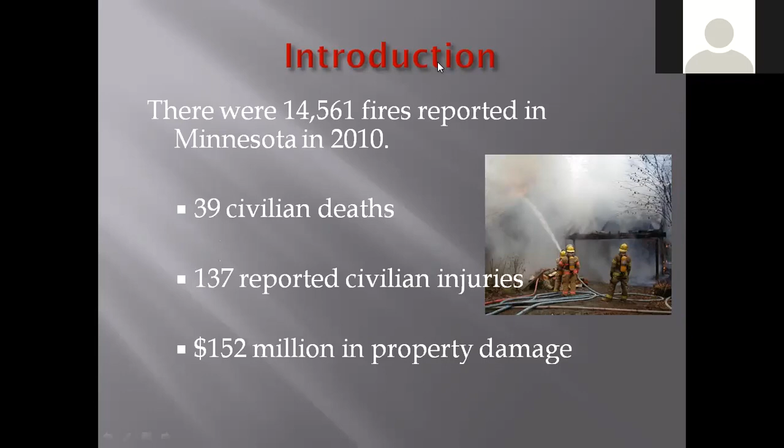Fire is responsible for a lot of things, and death is one of the things that fire results in. If you look at the example for Minnesota in 2010, there were 14,561 fires reported. Apart from the deaths, there were 137 reported civilian injuries, while there was 152 million dollars in property damage.

Most of us always feel our houses are the place that is safe for us. However, we can see that 76% of all structural fires occur in residential homes, while 97% of structural fire deaths occur also in residential property.

So what causes fire? Based on studies, the top 5 causes of fire include cooking, open flame, heating, incendiary or arson, and smoking. Those are the things that are responsible for fire.

So from there, we go to fire science. For fire to start, there are 3 things - there are things that will make fire start. Let's look at them one after the other.

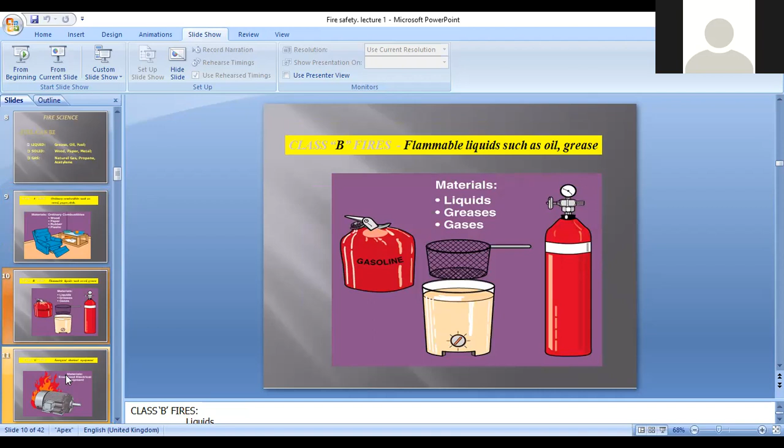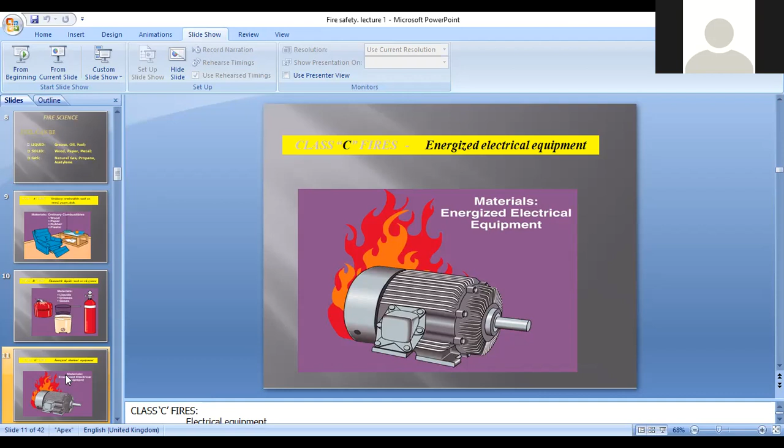Class B are flammable liquids, such as oil and grease. Those are class B fire. Class C are energized electrical equipment, while Class D are flammable metals.

We will add some more of the classes when we get to it, but these are just preliminary for us.

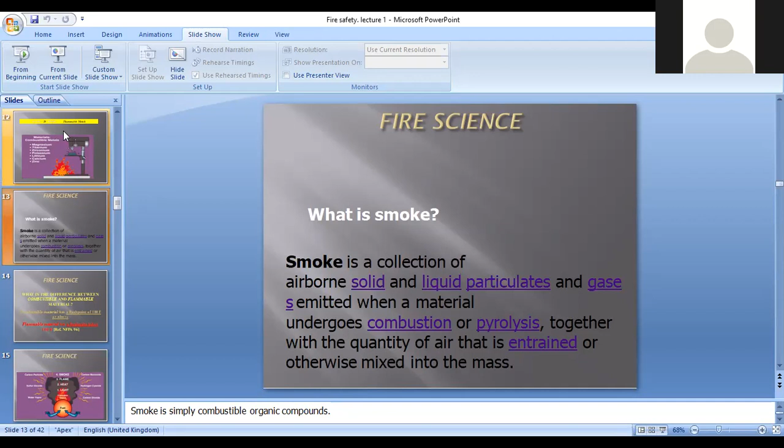So we said fire is always accompanied with many things. One of the things that accompanies fire is smoke. So what is smoke? Smoke is a collection of airborne solid or liquid particles and gases emitted when the material undergoes combustion or pyrolysis. That is what we call smoke.

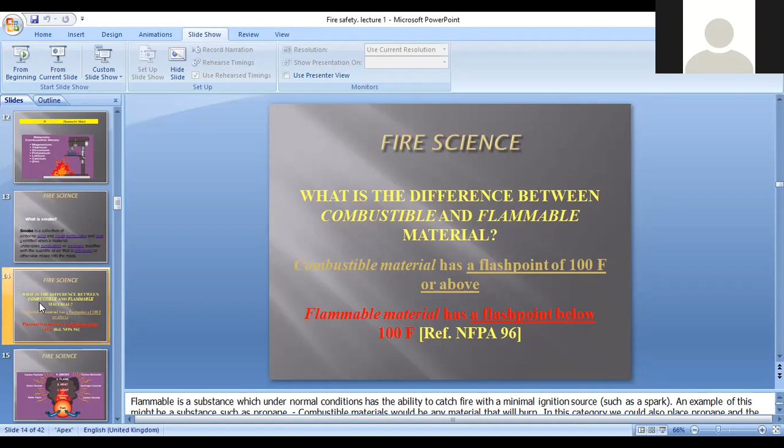So when fire burns, when things burn, it causes fire. But there are two different types of burning that occur - what we call combustible and what we call flammable. Combustible materials are materials that have a flash point of 100 degrees Fahrenheit or above, while flammable material has a flash point below 100 degrees Fahrenheit. That is the difference between a combustible and a flammable.

So when fire occurs, we always feel that the only thing that we see is the flame or the smoke. However, when fire occurs, there are other gases or other things that accompany fire - carbon particles, sulfur dioxide, water vapor, carbon monoxide, hydrogen cyanide, light, smoke, heat. Those are the things that always accompany fire.

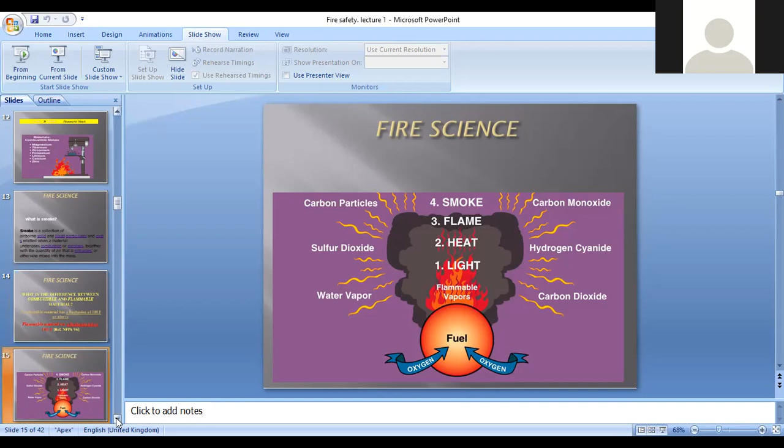So we know that for fire to occur, we need the tetrahedron of fire, which means the three elements of fire - fuel, heat, and oxygen - must combine together to form the fire tetrahedron through a chemical reaction. That is when the fire occurs.

But when that fire occurs, how does it burn? That takes us to the phases by which fire burns. The phases at which fire burns also depends on the time the fire is burning, the kind of air within that environment - meaning the ventilation characteristics of the confined structure - and the amount and type of combustible material present. What is burning also determines the phase at which the fire burns.

If you put a metal down and paper down and light the two, it will take a few minutes for the paper to ignite, but it will take a longer time for the metal to burn. If you take paper and wood, paper will burn quickly and get off easily, while wood will also burn but take a longer period.

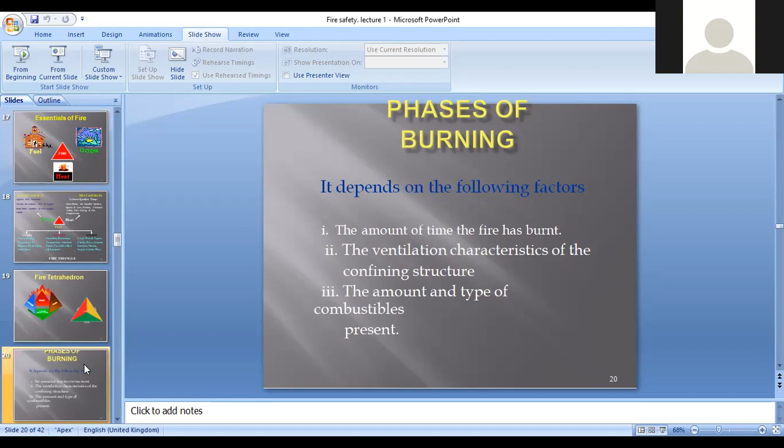That is why they say it depends on the amount and type of combustible materials burning. There are three basic stages of burning: the incipient or beginning phase, the free burning phase, and the smoldering phase.

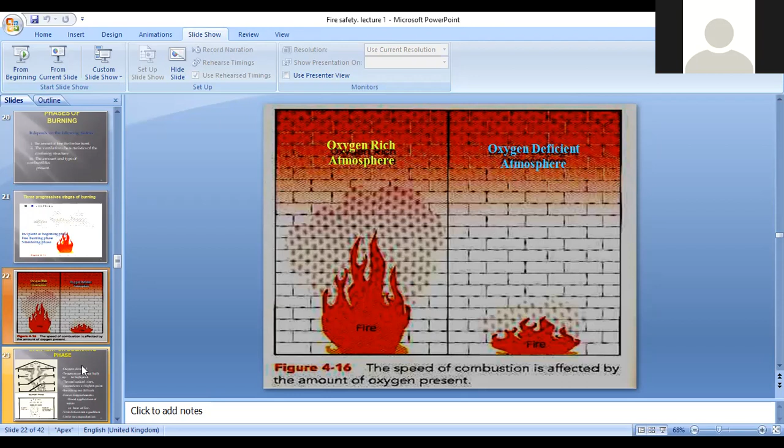At the incipient stage, oxygen is very rich and plentiful. The fire has just started and burns very rapidly. Temperature has not really built up, breathing may not be difficult, and with a little fire extinguisher you can quickly extinguish the fire.

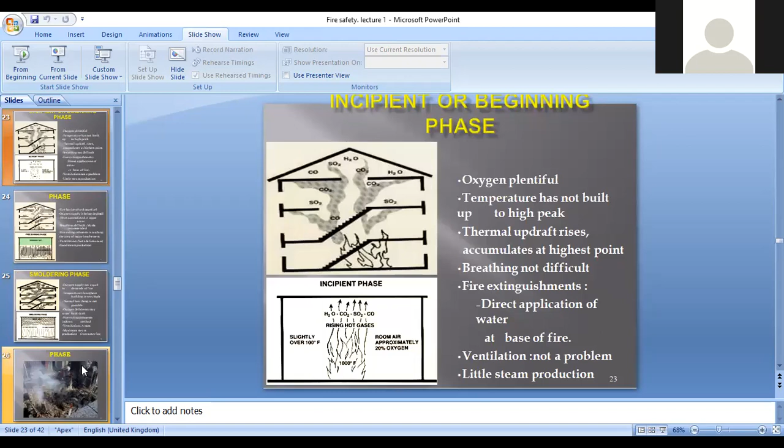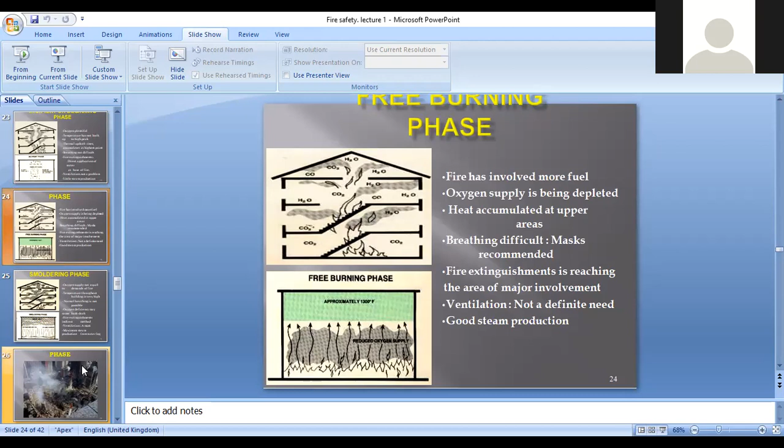The next stage is the free burning phase. Here the fire has involved and engulfed more fuel. The fire has more power, and oxygen supply is already depleting, though heat has accumulated at the place.

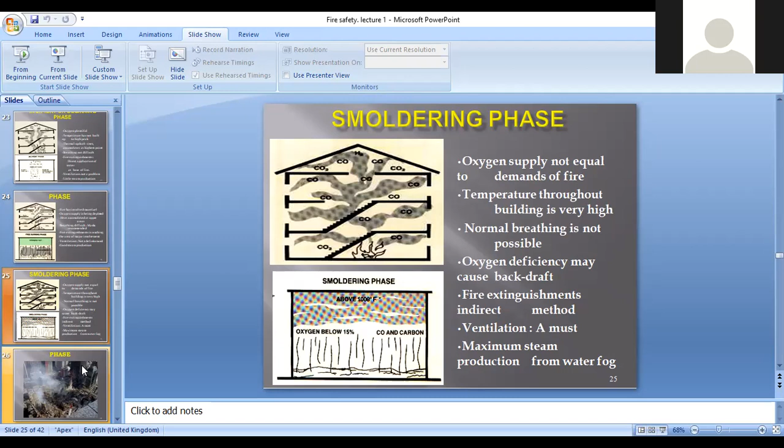The last stage is the smoldering phase. Here oxygen supply is not equal to the demand of fire, and the temperature throughout the building is very high. Oxygen depletion may cause backdraft, the fire may burn off and on, fire extinguishing becomes more difficult, and breathing and ventilation become difficult because a lot of smoke has fully developed.

From there we now discuss the mode of spread of fire. How does fire spread? A fire will start at one end of a building, and within a few minutes it gets to all parts of the building.

Fire spreads through three different means: conduction, convection, or radiation. Conduction occurs only in solids, while convection occurs in liquids and gases. In radiation, heat is radiated from a hot object and goes into a different medium; it is neither conduction nor convection, but heat rays emitted from a hot object.

Let me explain conduction. If you light a candle and hold a spoon, putting one end on the candle, after some minutes you will drop the spoon. Why? Because the heat has transferred from the part of the spoon having contact with the candle to the other end. That is conduction, because it passes through that metal.

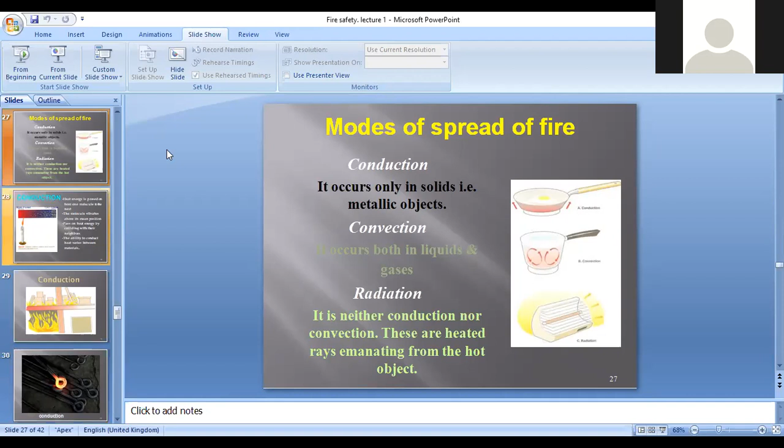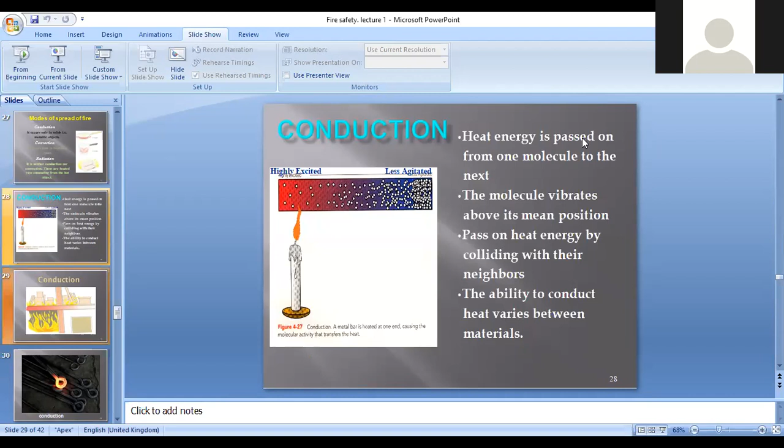Convection occurs when heat passes through both liquid and gases. In conduction, heat energy is passed on from one molecule to the next; the molecule vibrates above its mean position, and the ability to conduct varies between materials. In convection, when a liquid or gas is heated, it expands, becomes less dense, and transfers the heat.

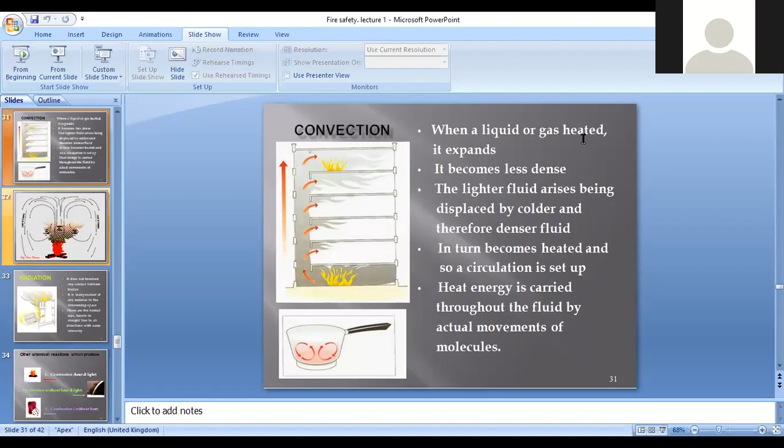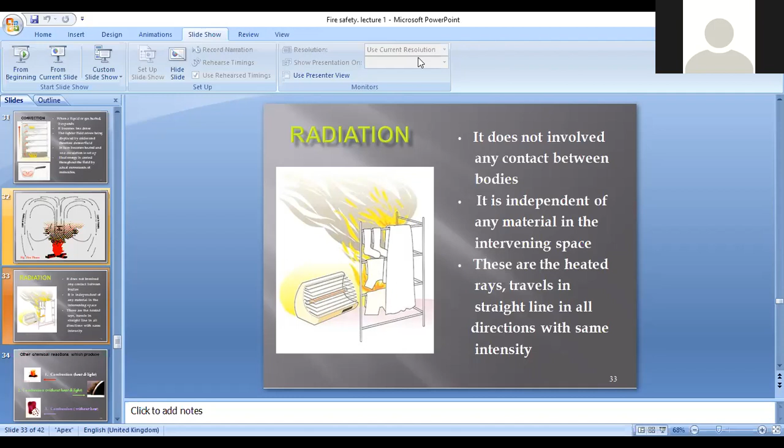For radiation, it does not involve any contact. If you put on a torch like a laser and point it at a white paper, whether the torch touches it or not, it's just the ray touching the paper. After some time, the portion where the ray is pointed becomes heated and will eventually burn off. That is radiation.

Now let's look at combustion. There are four types of combustion: slow and incipient combustion, rapid or active combustion, deflagration, and explosion.

Slow and incipient combustion is when the amount of heat and light emitted is feeble, like burning something small. Rapid or active combustion involves a considerable amount of heat and light emitted within a very short time. Deflagration takes place with considerable rapid heat involving light, while explosion involves a loud noise within an extremely short time when it is generated.

Rate of combustion: what are the things that contribute to combustion? The area of contact with air, the amount of heat generated, the ability of the material to conduct it itself, the atmospheric humidity, the wind velocity, temperature, and atmospheric pressure.

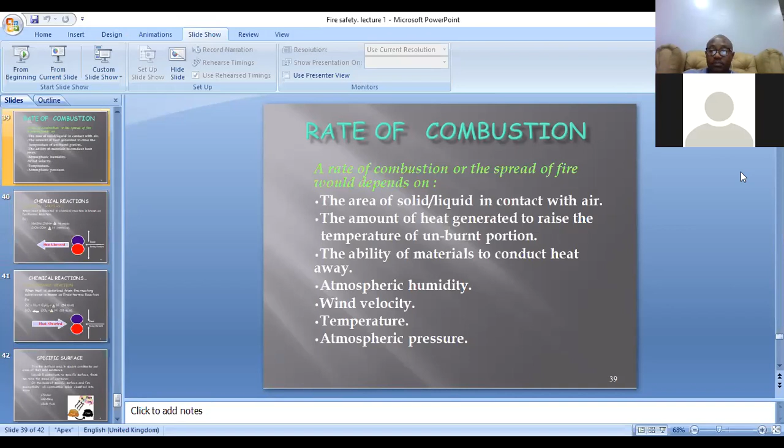Fire burns more during dry season than during wet season. Why? Because the atmospheric humidity is very low, the air is already dry, and the wind is always higher during dry season. This contributes more to combustion. So the rate of combustion or spread of fire would depend on the area of solid or liquid in contact, the amount of heat generated to raise the temperature, the ability of the material to conduct heat, the atmospheric humidity, the wind velocity, the temperature, and the atmospheric pressure. Those are the factors affecting the rate of combustion.

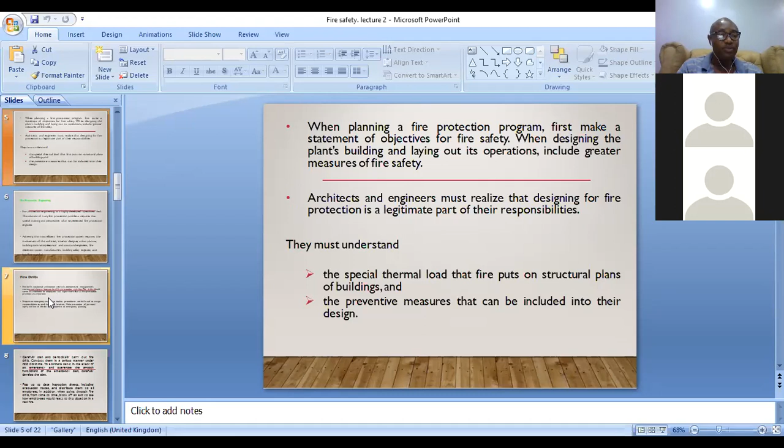So carefully plan and periodically carry out fire drills. Also, you must make people aware about fire - their knowledge about fire is very, very important. Some fire prevention activities include regular scheduled inspection of all fire protection equipment. Some people have a fire extinguisher in the office but they will not check it. It's only after a fire incident occurs that they go there and pick the fire extinguisher, only to find it's not working or hasn't been serviced. It's because they did not check it. So it is important for us to inspect and also communicate.

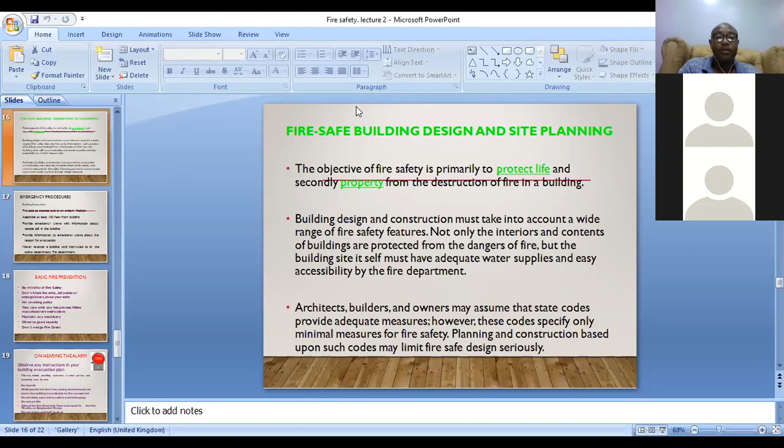Once fire has been detected and there's potential that it will be very bad, you need to raise an alarm for all the occupants, and as well mobilize fire protection forces to come in and act. For every place, there must be what you call an emergency procedure. What are the emergency procedures in place? For building evacuation, you must have an assembly point. You must provide information to the emergency crew about the reason for evacuation when they arrive.

So what are the basic fire prevention tips? Be mindful of fire safety. Don't block any exits, call points, or extinguishers. Make your company have a no smoking policy. If you want to smoke, designate a place outside where smoking can occur. Take care of any hot process that could lead to fire. Maintain all machineries. Observe good security in case there could be arson or people may deliberately want to come and set fire to a property. Don't wedge fire doors - never use anything to obstruct a fire door.

It is important for us to know that if you don't have knowledge about fire, don't try to fight fire yourself. If you don't have any knowledge about fire, don't try to fight fire yourself. Always raise an alarm, call for fire service, and inform them about the fire.

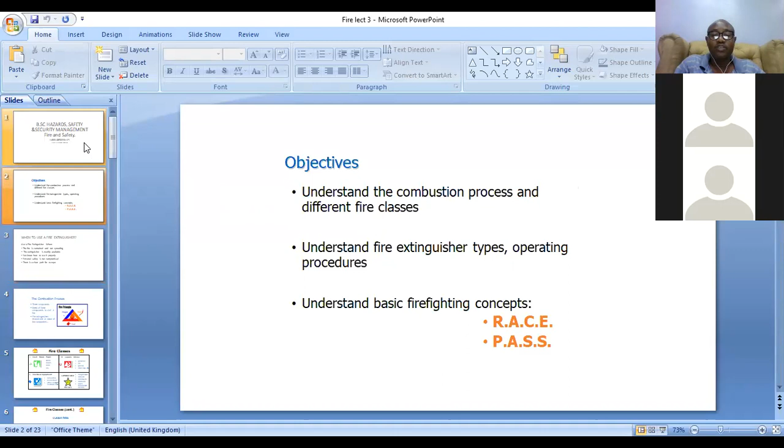Lecture 3 is the use of fire extinguisher. We will understand the combustion process and different fire classes, and understand fire extinguisher use and the procedure for operating a fire extinguisher.

What are the fire classes we talked about? There's class A, class B, class C, and class D. Class A fires are ordinary combustible materials like trash, wood, or paper. Class B fires are liquids or greases, including gasoline, oil, or other solvents. Class C are electrical components like computers or fax machines, energized electrical material, while class D are combustible metals.

Another class is called class K, or in some countries class F. This involves combustible oil, fat, or cooking oil, classified as class K or class F depending on the country.

Let's look at the anatomy of a fire extinguisher. What makes up a fire extinguisher? The first thing is the pressure gauge.

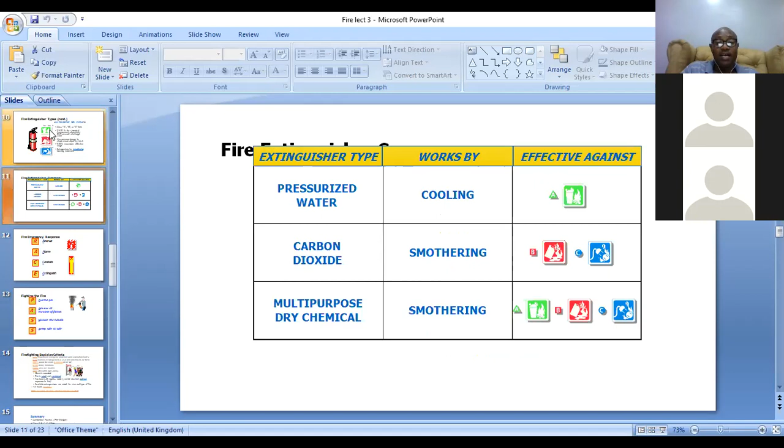When there is fire, there's an acronym we normally use: RACE - rescue, alarm, contain, and extinguish. When there is fire, the first thing you plan for is to rescue, raise an alarm, contain it, then extinguish. Don't say let me put out the fire before you go and start saving people - the first thing is rescue, alarm, contain, and extinguish.

So how do you use a fire extinguisher? Before our exam, or even after, we are going to do a practical section where we go to Lagos State Fire Service and do the actual practical there.

For you to use a simple fire extinguisher, there's an acronym we use called PASS: pull the pin, aim low at the base of the fire, squeeze the handle, and sweep. That is the acronym we use.

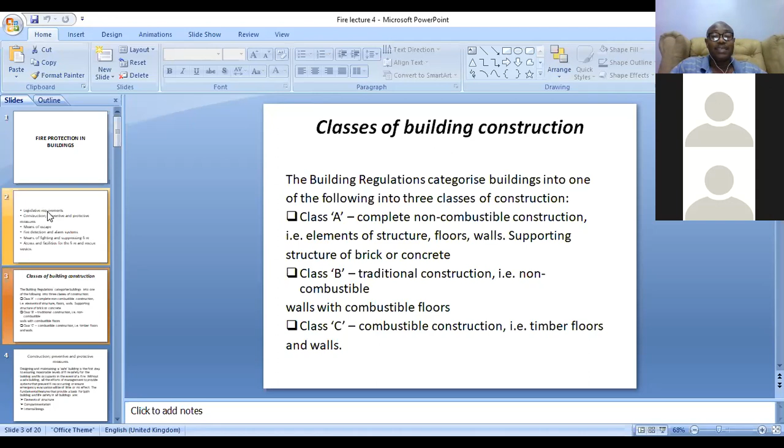Class B buildings include traditional construction, meaning non-combustible walls, but sometimes combustible floors—they can use wood as flooring. Class C are combustible construction, where everything is made from things that can burn.

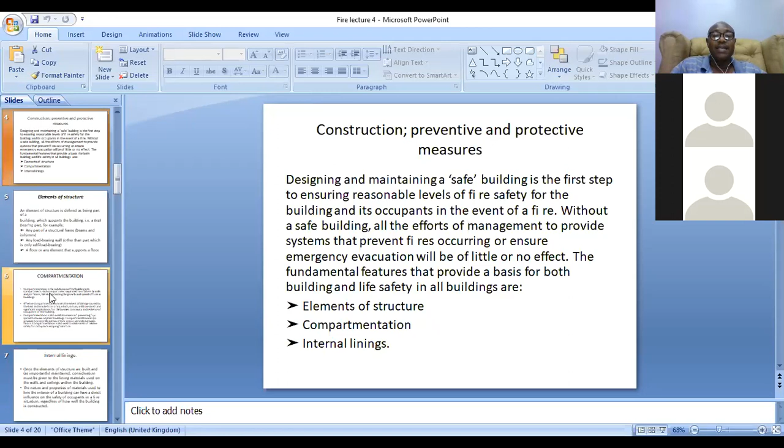For construction preventive and protective measures, we will talk about elements of structure, compartmentation, and internal linings. The element of structure is defined as the part of the material used to build the main building—the frame, the beam, the column.

If you look at most buildings now, you see that metals—iron, steel, very big iron steel—are used as the element of structure. Unlike in the olden days, whereby block was used as the element of structure, now metals are used.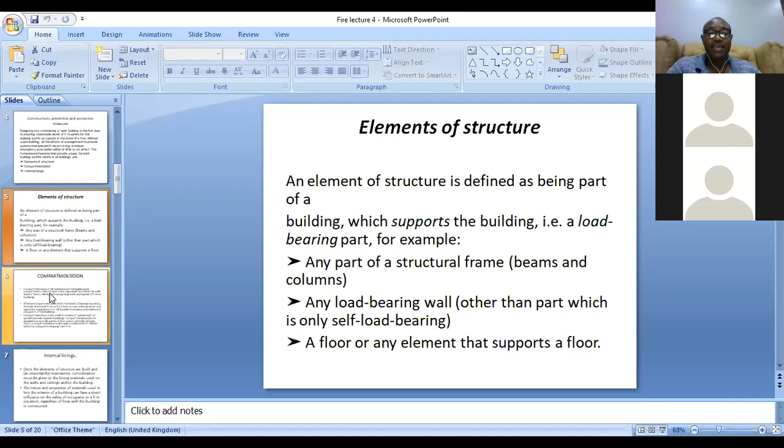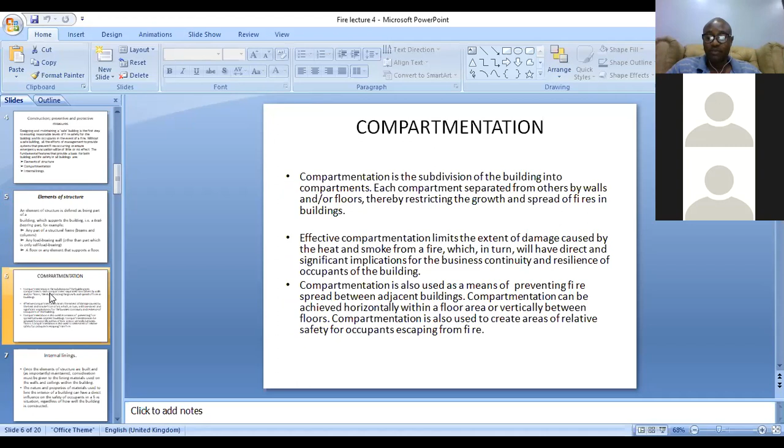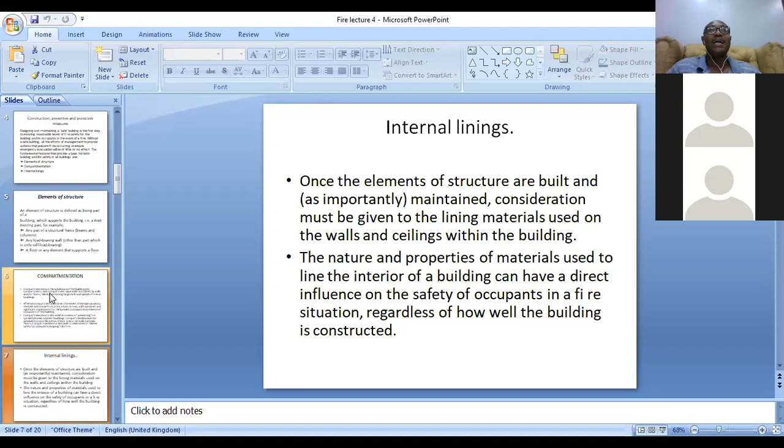The next one is compartmentation—what do you use to separate the building from one another? Also, what are the linings put in place? Nowadays, most people use POP on the wall. All these things are called internal lining, and they always contribute to fire. If you read the material, you'll see the examples given there.

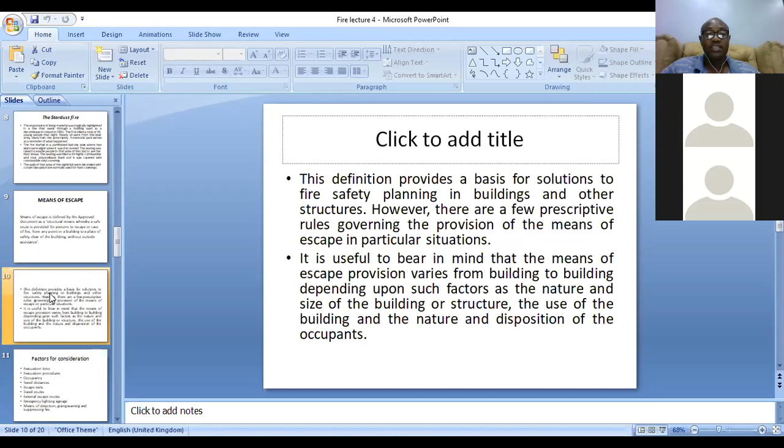The next one is means of escape. Means of escape is defined in the approved document as a structural means by which somebody can escape a property in case there is fire. So for you to determine the means of escape, what are the factors to put into consideration?

What is the evacuation time? What is the evacuation procedure? What is the occupancy? What is the travel distance? What is the escape route—the route which the person takes? Are there emergency lighting signage or means of detection, giving warning or suppressing the fire? This also determines the evacuation time.

To determine the evacuation time of a building: when did the fire get detected? Who sounds the alarm? Occupants should be able to recognize the alarm and respond to it. What is the time it will take to evacuate everybody? For a Class A building, the evacuation time is 3 minutes. For Class B, it's 2.5 minutes. For Class C, it's 2 minutes.

I've given different examples of escape distances for different categories of building. For a residential institution like a care home, the distance to the door and means of escape must be between 9 to 18 meters. For hospitals, 15 to 30 meters. For hotels, 18 to 35 meters. For schools, 15 to 32 meters.

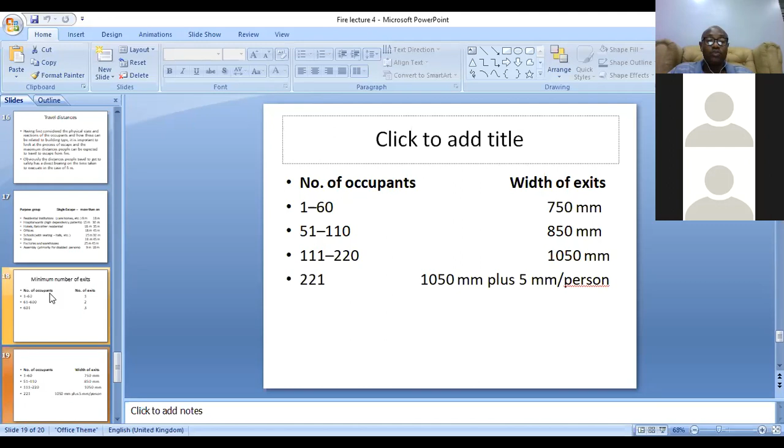So how wide should the door be? For a building with 1 to 60 occupants, the door must be 750 wide. For 51 to 110 occupants, it must be 850. For 111 to 220 people, it must be 1050, etc.